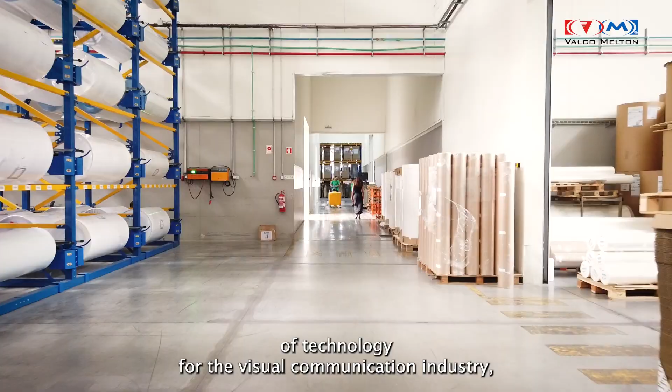Digidelta is a manufacturer and an integrator of technology for the visual communication industry, the label industry, and the decoration industry as well. We have more than 37 years experience in these industries.

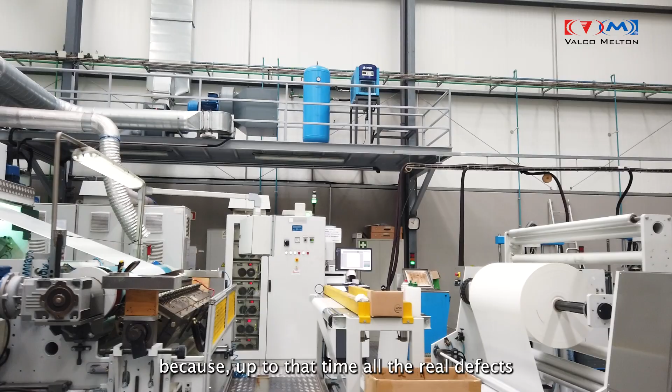We have, and we still have, 4 coating lines, and we had a big challenge because up to that time all the real defects were just checked by personnel and not by a machine.

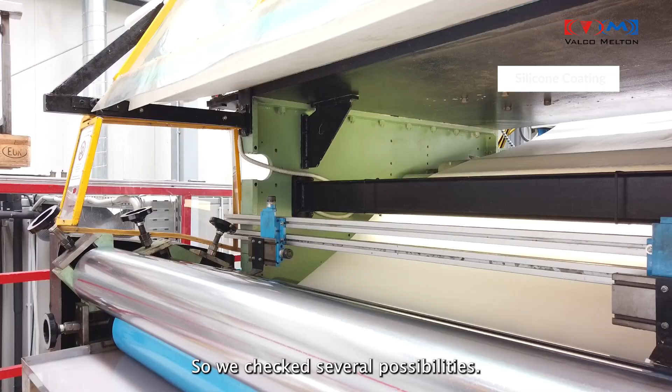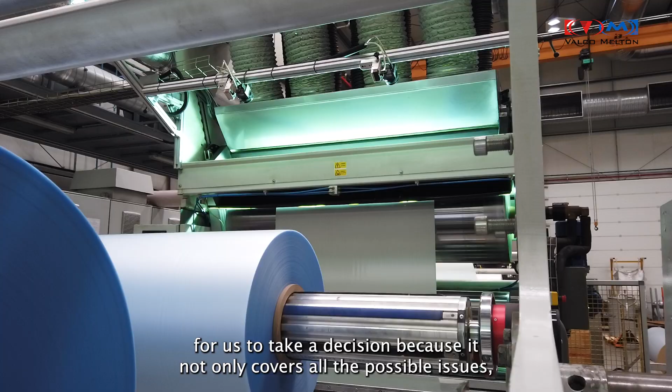So we checked several possibilities, several companies that were trying to propose a solution for us, but then we came to know about Inspekt. It was easy for us to take a decision because it not only covered all the possible issues, or even improved on how the issues could be identified, but we also immediately had a close relation, and for us this is very important because besides working with a professional company, we are still working with people, and people that are close to us.

Hello, my name is Roberto Fonte. I am the Inspekt specialist from Valco Melton.

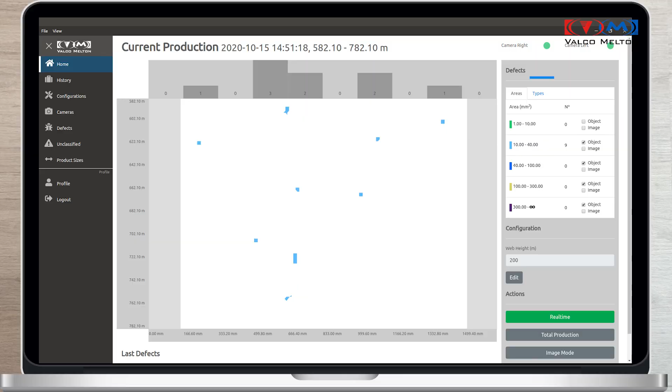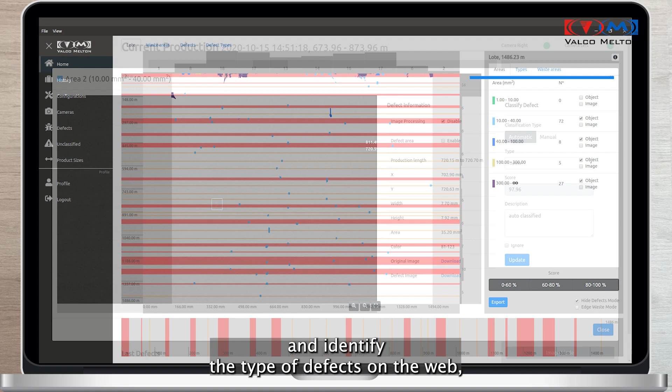Inspekt is a vision system that can inspect the adhesive coating online. It's based on artificial vision technology and deep learning AI. Basically, we can follow the production in real time, inspect 100% of the production, identify the type of defects on the web, and generate alarms and data for the companies.

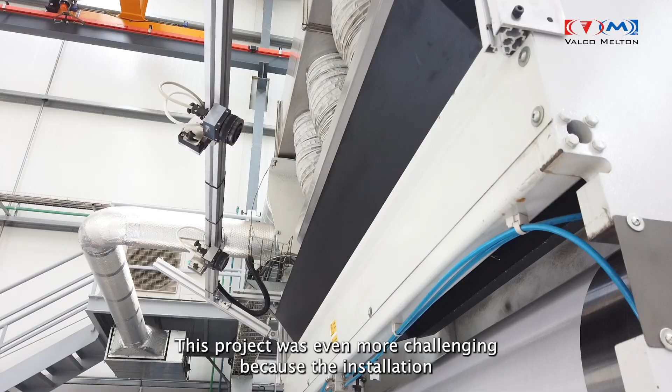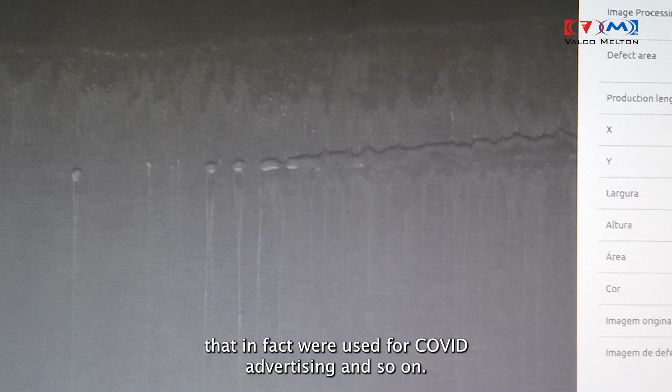As we can all imagine, installation is always a challenge. This project was even more challenging because the installation was during COVID, but during that time we were doing a certain type of products that were used for COVID advertising and so on.

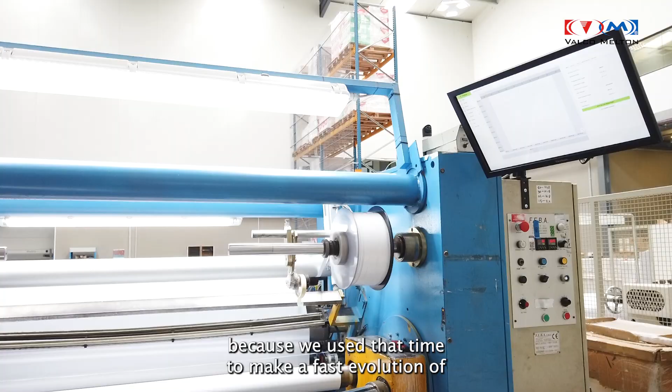COVID was very close to us, and we used that time to make a fast evolution in identifying the possible causes of issues. So that was not such a good time for humankind, but it was somehow a profitable time for us because we could make this upgrade in our facilities.

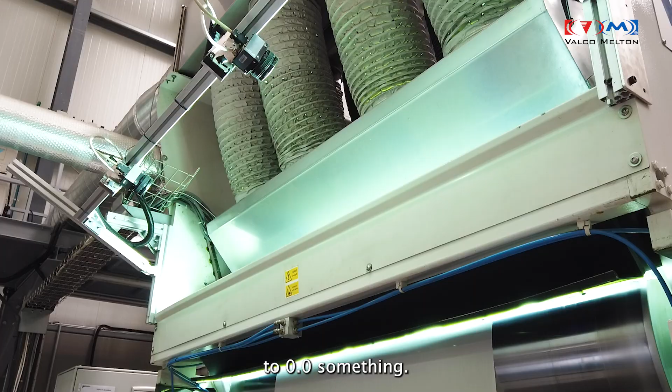Before Inspekt and after, we reduced the number of complaints as a percentile of production from 3 point something down to 0.0 something. This is the very first and most important rate, because if you can reduce dramatically the number of incidents to a customer, this is very, very important.

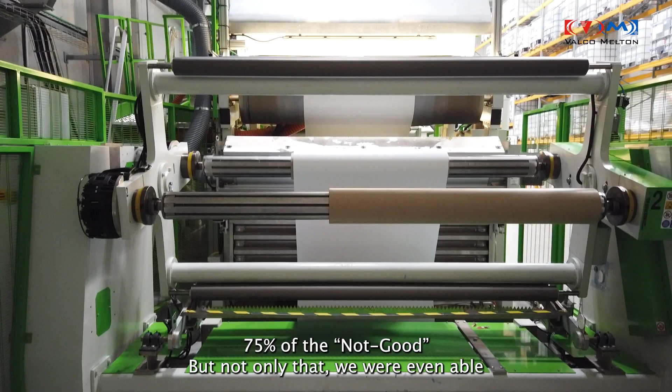But it was not only that. In not-goods, we reduced in some cases 75% of the not-goods. And not only that, we were even able to double our productivity in some areas of our factory. So our life after Inspekt was definitely much better.

To achieve results is always good, but of course to achieve them it is necessary to understand all the information that was collected from the inspection.

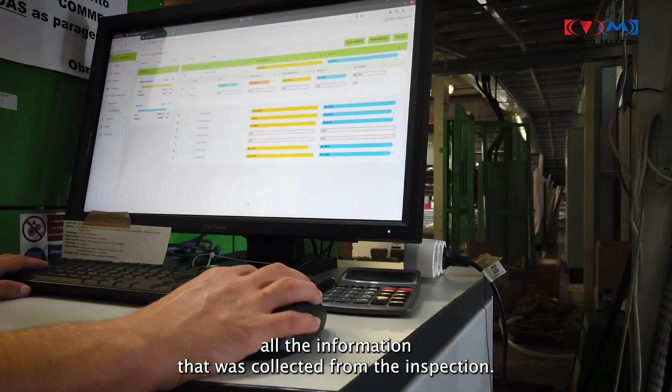With the MES tool, it was possible for us to have a common language for the different departments of the company—not only us as management to see what was happening in the line in the factory, but for the quality department and production department to understand what was happening, classifying all these issues and establishing an approach on how to eliminate them.

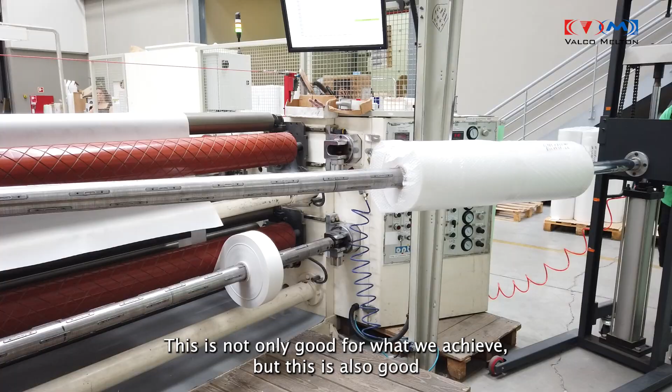This is not only good for what we achieve, but also good to understand what we need to prepare for the future, not only for existing products, but even new projects—they also need a base that gives us stability for proper production.

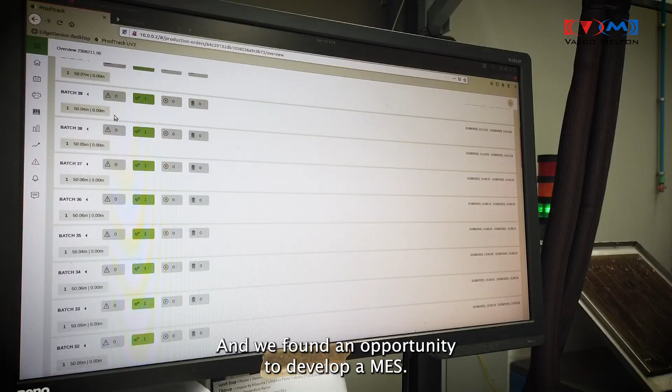With data generated on Inspekt, we needed to find a way to treat this data and keep the organization informed. We found an opportunity to develop a MES—a modern web application for production management, composed of different modules.

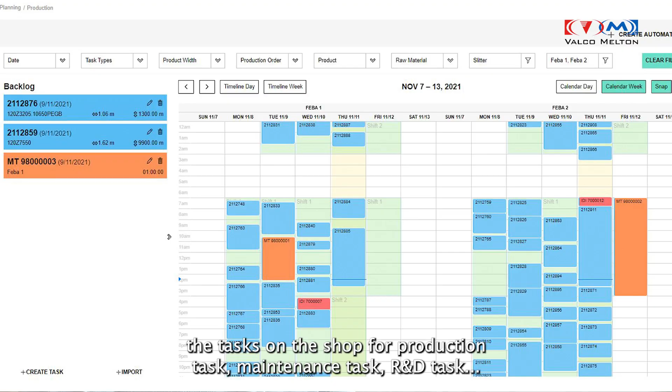The planning module is a drag-and-drop tool that plans efficiency for all tasks on the shop floor—production tasks, maintenance tasks, R&D tasks. The quality module allows the quality department to define the recipe and quality parameters for production and raw materials, and also lets the operator check during production.

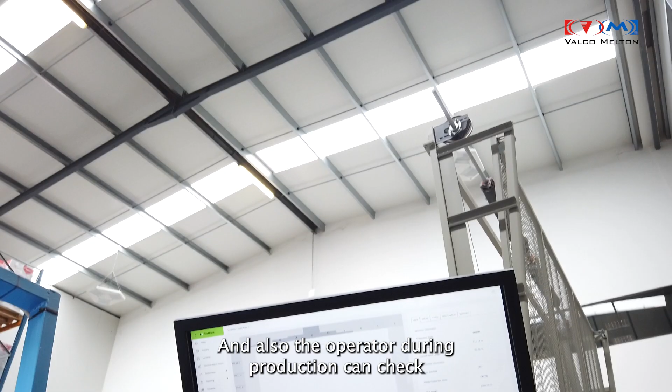The operator during production can check if the production is in the right shape. There's also a special feature for quality lab inspection that takes samples from production with the production work orders. We have another module we call the electronic batch record.

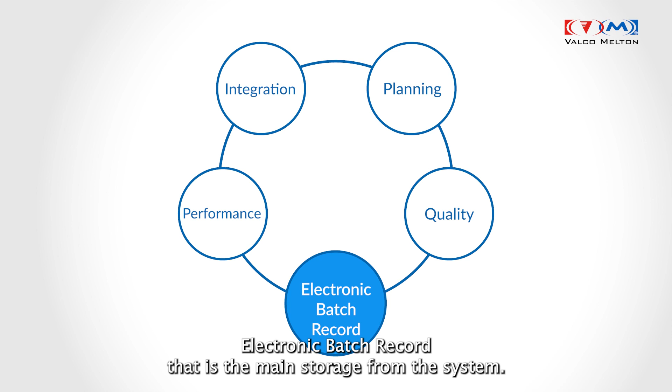That is the main storage of the system, allowing full traceability of production with automatic data that we collect directly from the machines. That also allows us to understand the state of the machine.

We have a performance module focused on KPI calculation for the factory or organization. We believe this is a way to align people and have a common language across the company based on data. One of the main KPIs we use in our platform is the OEE.

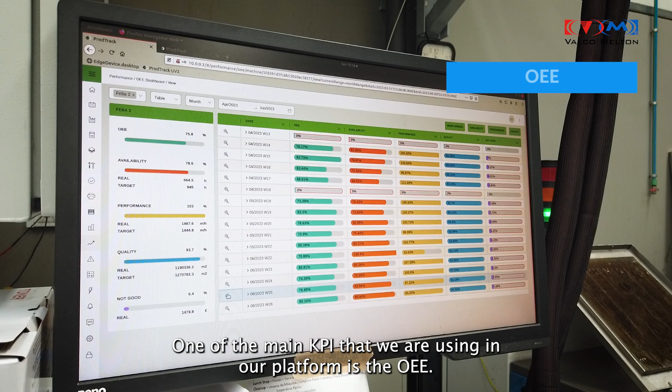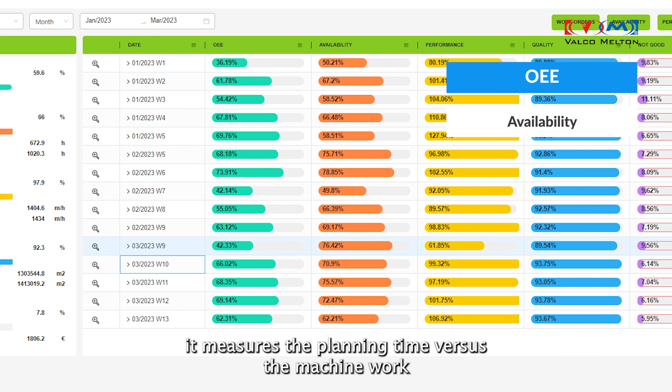Nowadays it's a standard, and it's a combination of 3 indicators: Availability, which measures planned time versus machine work hours; Performance, which measures production speed versus machine speed specifications; and Quality, which measures non-compliant production.

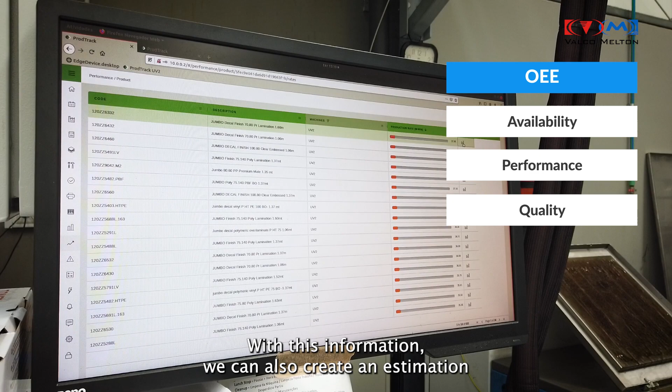With this information, we can also create an estimation of the cost of non-quality production. Also, our platform is ready for third-party integration. We have an API that allows us to integrate with an ERP, a warehouse management system, or another external platform.

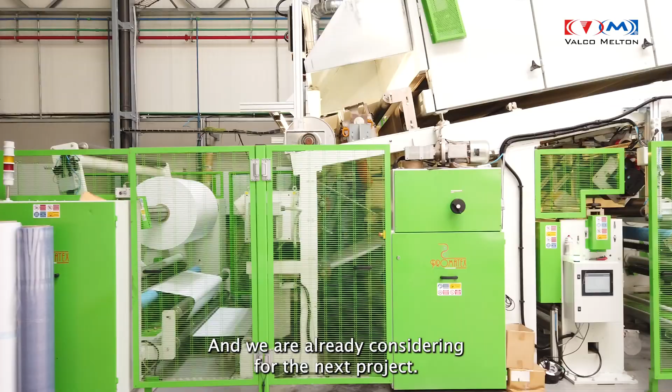We are becoming more and more confident with the product and the improvements it has brought to our factory, and we are already considering the next project. Everything is not yet covered for inspection, and the final phase, considering the face film, is yet to be developed. So definitely we are going with Valco for this future as well.